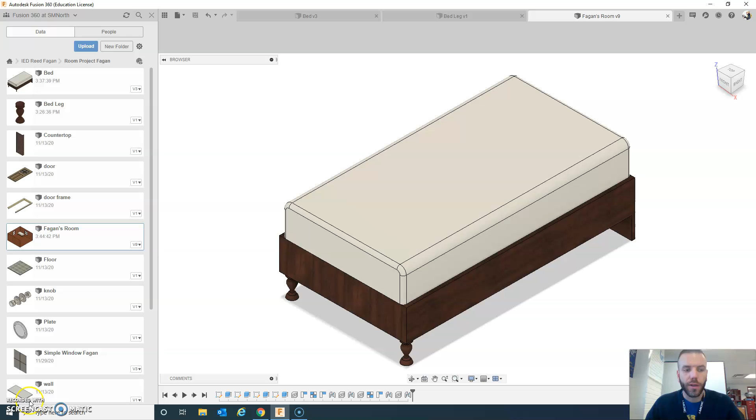So when we look at our room, we have the bed in there. But it's not just a normal bed. This is what we call a Murphy bed, which, if you're not familiar, those are beds used especially in bigger cities where your apartment space is limited, that folds up into the wall. And yours will be able to do this by the end of it. You'll be able to right click on that joint and say animate joint, and it'll show you how it kind of works as a Murphy bed.

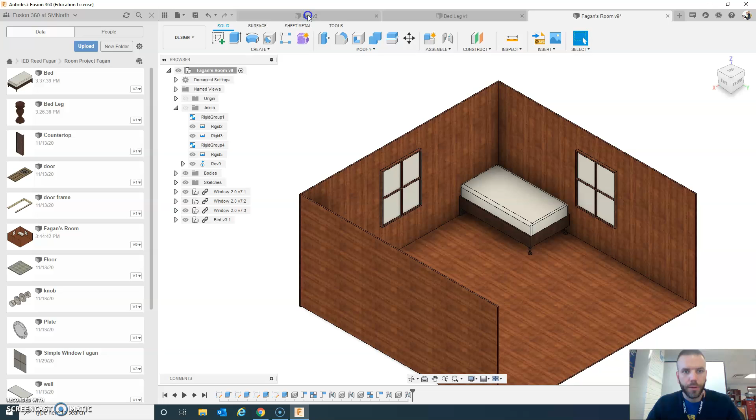So I'm going to escape. You press the escape key to get out of that. But yeah, you can basically lift that whole thing, and it's kind of fun. So let's get to making the bed. To make the bed, I'll start a new file here. You're going to call this bed when you go to save it, okay? The first thing you should do is click Save, Bed, make sure it's inside your room project folder.

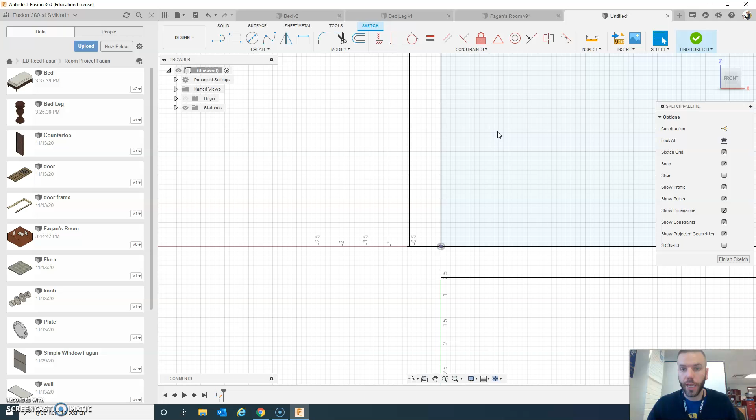So we'll start by creating a sketch, and we'll use this plane, and you're going to need to make a rectangle that is, I think, 10 inches by 40 inches. So I hit the tab key to get the other one, enter. There is the beginning of our frame. From here, we're going to extrude this a distance of, I always like to go at an angle when I do anything 3D so I can see what I'm doing, 72 inches. That seems like a reasonable length for a bed.

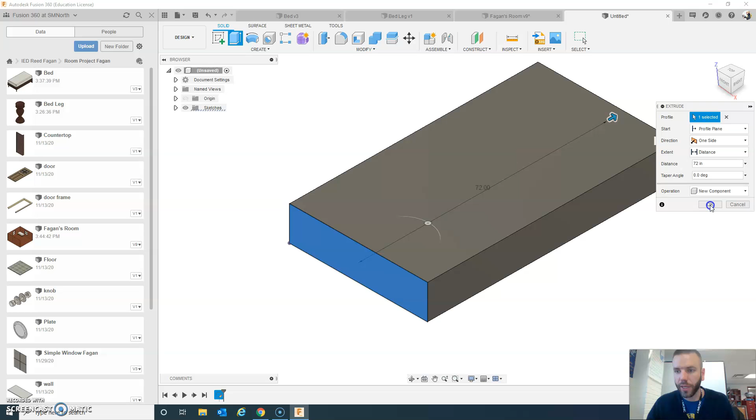So we've got that, and actually we're going to save this as a new component. So we're going to click OK, and we will name this component. Whoops, just click on there a couple times. We'll call it bed frame. Enter. And we're going to do some other things with this bed frame. I guess we'll do the next part and then we'll change the material.

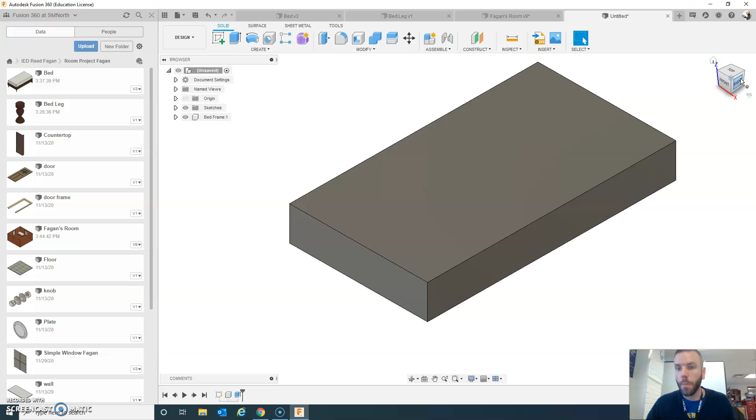So the next thing I want to do is create kind of the legs that are at this end that are going to let us make this easily a Murphy bed. So create another sketch, put it on this plane, 2-point rectangle, and we'll start right at that corner like I just did. We're going to make it a height of 7 inches, and then this thing can only be 1 inch wide. So hit enter.

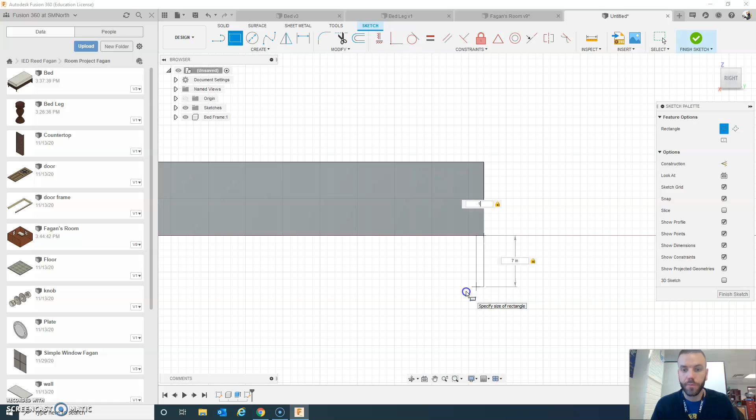And then we're going to need to extrude this back. So finish sketch, but extrude it back 40 inches, right? That's the width of the bed. So click your profile you want to extrude, and then just type in there 40.

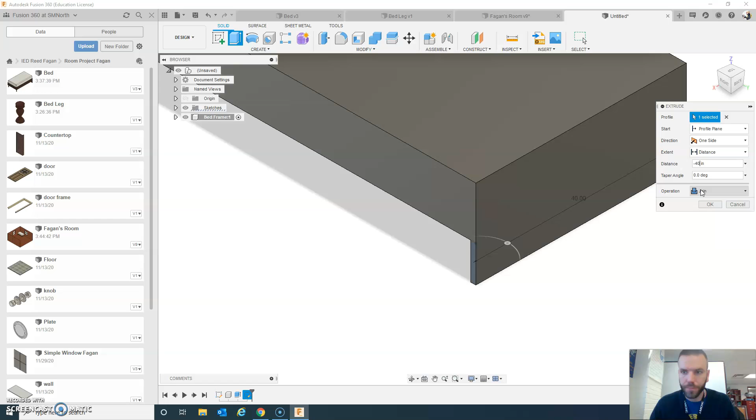All right, perfect. So we are basically done with the simple parts of the bed frame. We have these kind of weirder non-bed legs on the back because it's going to make that Murphy joint, the ability to do that with the Revolute, a little easier. We need to change the material. So we will change this.

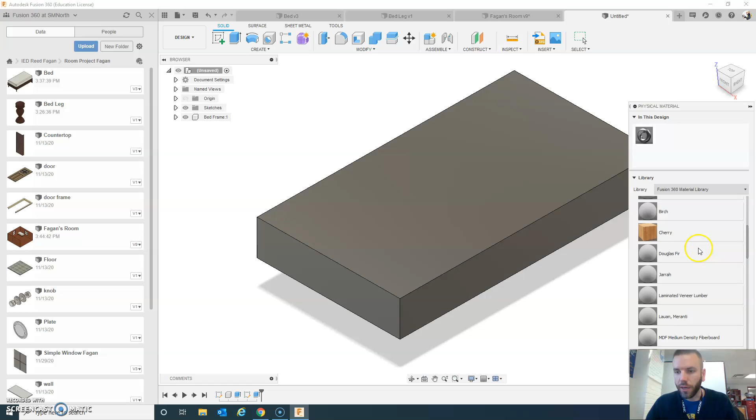And, you know, a lot of bed frames traditionally are wood. So I chose mahogany. All right. But you could pick some other material as you like, as long as it makes sense. It's not anything ridiculous. All right, so great. We've got the bed frame.

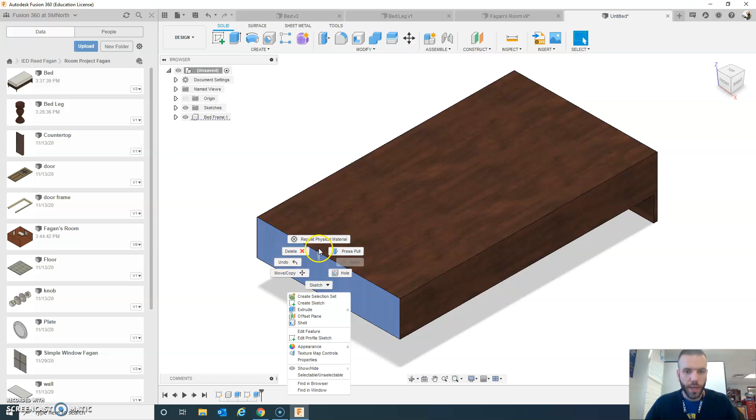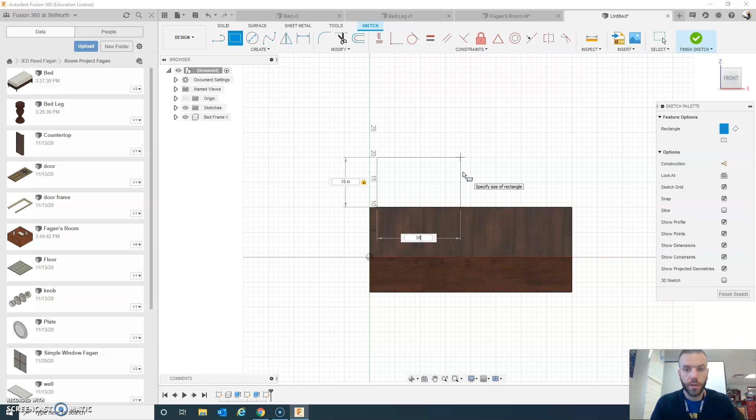Before we get to the leg, let's put the mattress on here. So to do that, we'll create another sketch over here. I'm going to right-click on this surface, and we'll say Create Sketch. And we want to do another 2-point rectangle. I'm just going to place that first corner somewhere along there. I'm going to make it 10 inches tall. And we will make this thing 38 inches across. It's a little smaller than our frame. So hit enter.

And before we do anything else with it and finish our sketch, let's project some geometry so we can use it from this line. And what we'll be able to do now, just say okay, is come here and dimension this distance to be 1 inch, so it's nice and centered. Okay, so now it's perfectly centered.

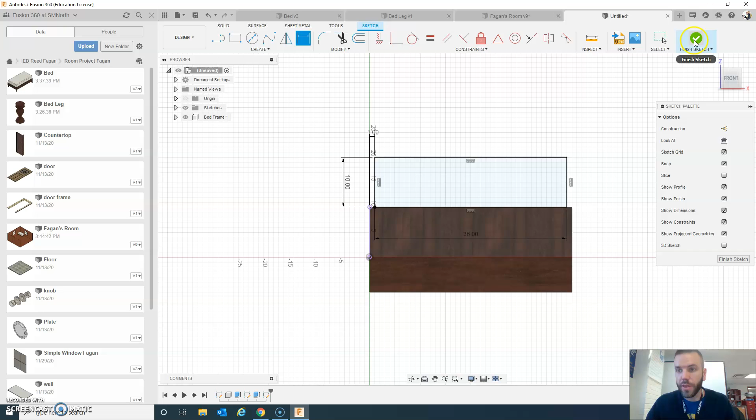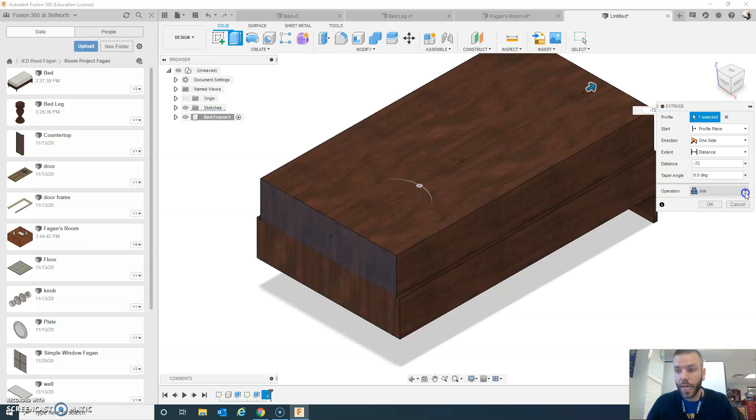Say finish sketch. We're going to extrude this back the same distance, and that's going to be, let's see, I think it was 72 inches, right? 72. But here's the deal. Before you click OK, we need to change this and make this a different component, because it is not mahogany, or it shouldn't be, and it's not the frame. So click New Component, and now we'll click OK. And we are going to call this component, oh, I did that wrong, the mattress. All right.

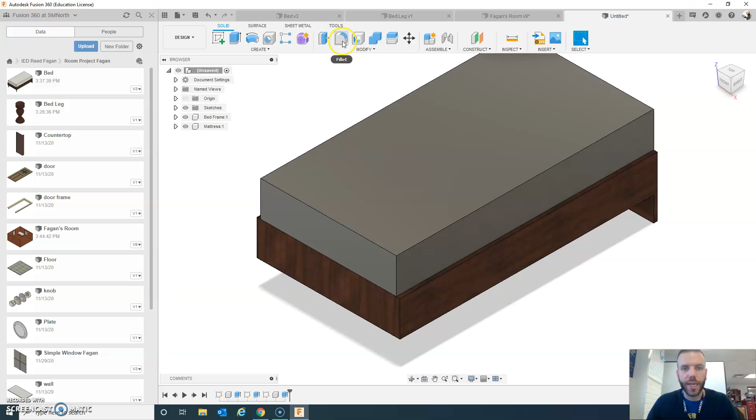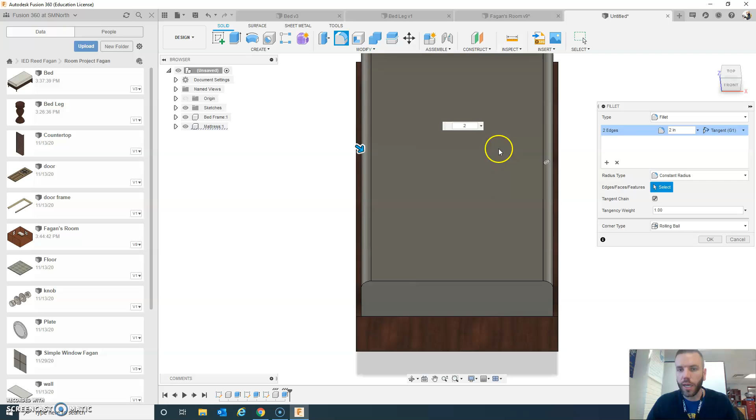Something you may know already, but if not, you're going to learn it, is filleting. So we want this to look more like an inviting mattress. So we will fillet both this edge and that edge, with a radius of 2 inches. And if I go to the front view, or maybe top front, you can kind of see what it's doing there, right? That seems more like an actual mattress anyway. So we'll click OK there.

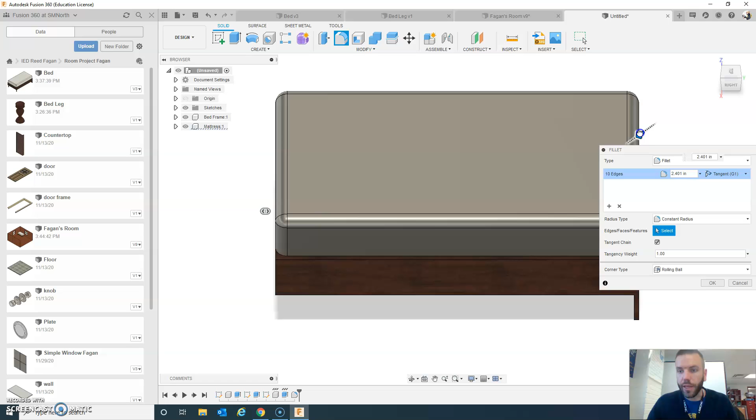And then we're going to do the same thing, but for these edges, because they also look a little too sharp, right? So go to Fillet, click that edge, and then click this edge over here. And we're going to make that 1 inch, because 2 inches is a little too much. Usually this end of the bed would look different, right? So we're just going to say 1. And so now it looks a little bit more like a bed.

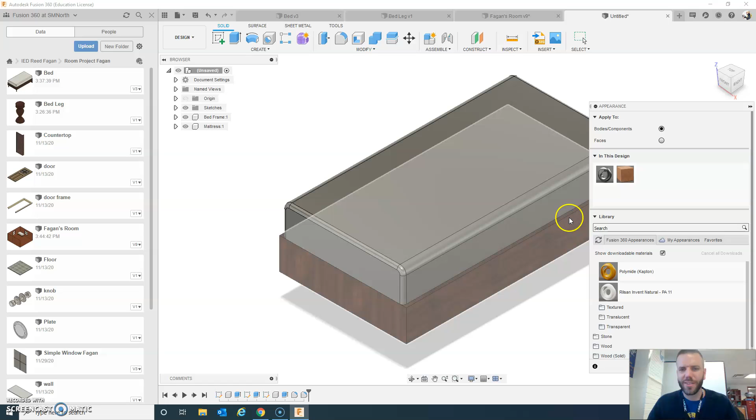To really finish this off, we should change the appearance of this. I couldn't decide on what a good material would be for a mattress, because it's made out of many materials. There's components within it, right? So for our simplified stuff, let's just choose a nice color. So powder coat white. The way I got to this, by the way, because I know it's not going to look the same for you, I went to Change Appearance in Modify.

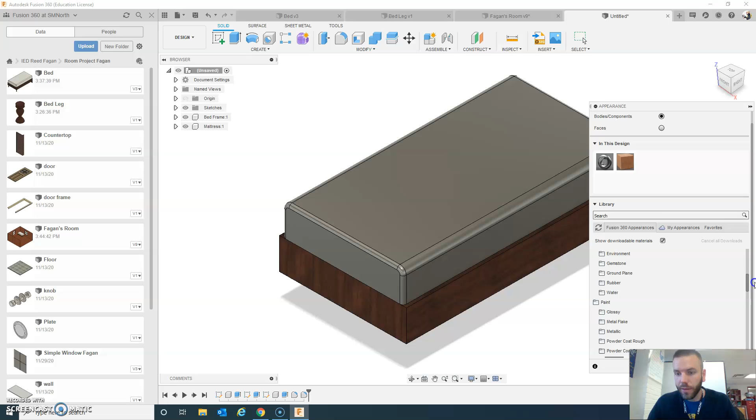So I'm in Appearance, and then I went to the library, found the Other folder, and in that folder I came to Paint, and then Powder Coat Smooth. I know that's kind of specific, so one more time: Appearance, Library, Other, Paint, Powder Coat Smooth, and then we're going to do white, and just drag it over to that component. Then you'll click OK, or close. And we have got, so far, our bed frame and mattress. Next video will be about the leg.